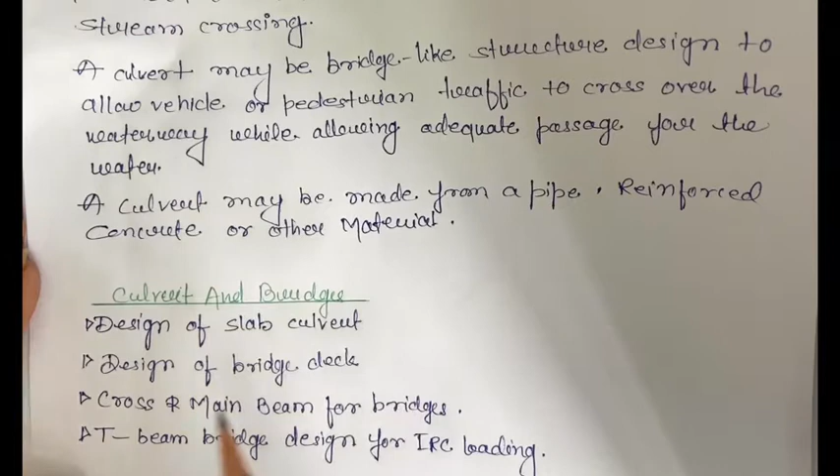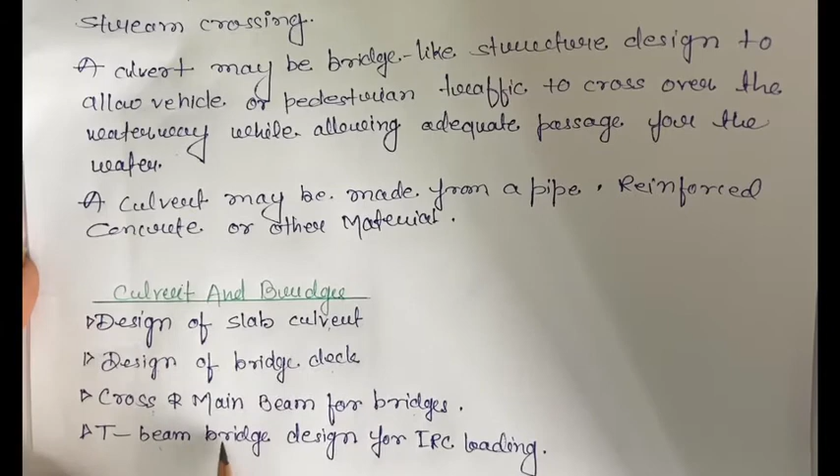We will start with the new topic, culvert and bridges. In this chapter, we have to study the design of slab culvert, design of bridge deck, and cross and main beam for bridges, T-beam bridge design for IRC loading. Okay. Culvert and bridges we are going to study.

Okay. So what is a bridge? A bridge is a structure built to span physical obstacles such as a body of water, valley or road without closing the way underneath. It is constructed for the purpose of providing passage over the obstacles.

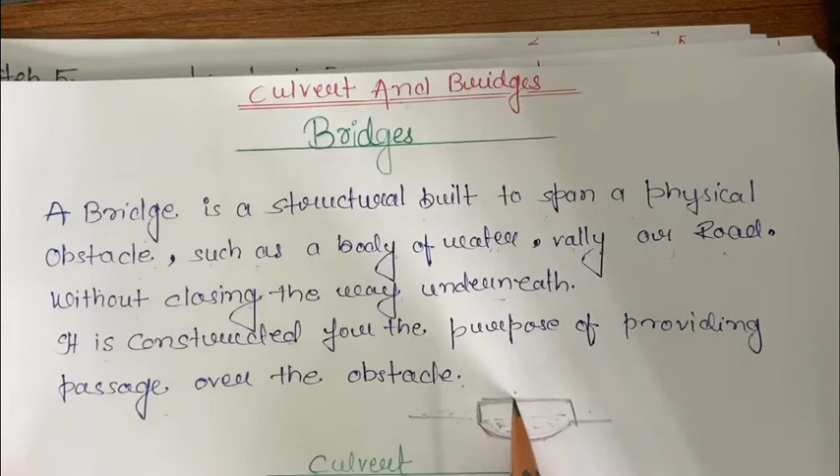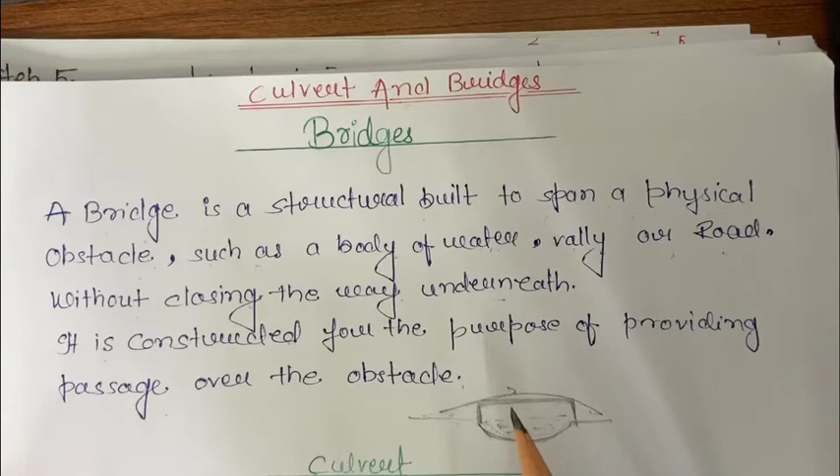Okay, so in this chapter we will know about the design of bridges, slab of bridges, beam of bridges. So first of all we are going to design a deck slab or solid slab of bridge. We will go through the design steps for deck slab, that is also known as solid slab. Okay, so what are the design steps for solid slab of bridge?

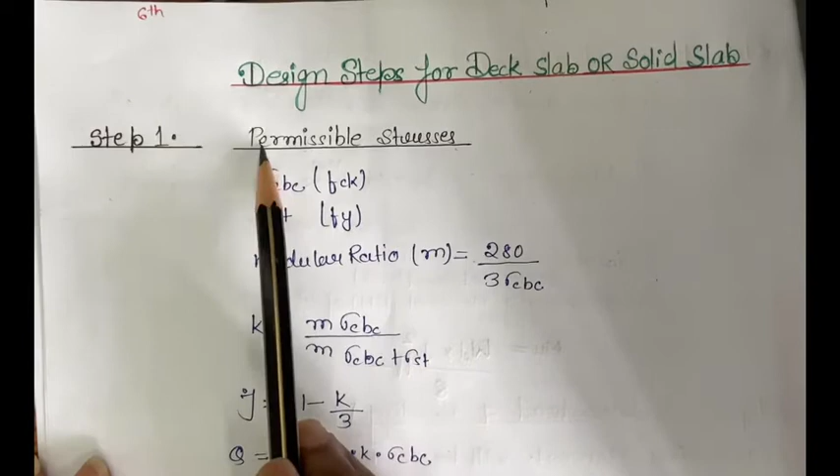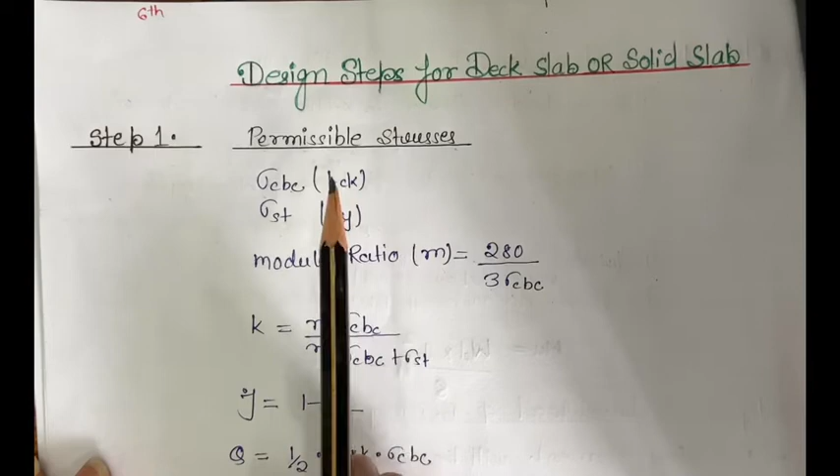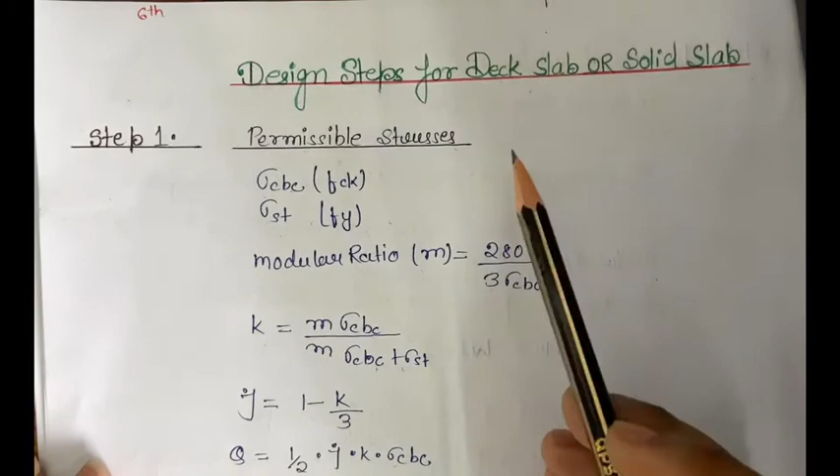Sigma CBC is the characteristic strength of concrete. Sigma ST is the characteristic strength of steel. Now we will find out K by the formula m sigma CBC divided by m sigma CBC plus sigma ST. Now we will find out J, 1 minus K divided by 3, and last in permissible stresses, Q equal to half JK into sigma CBC. Okay, in the first step we will find these things. In the second step we will find out the depth of the slab, effective span of the slab. First assume the thickness of the slab.

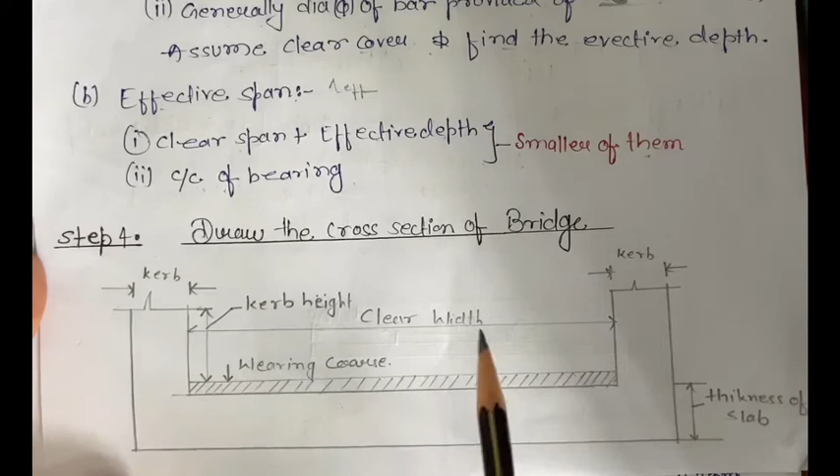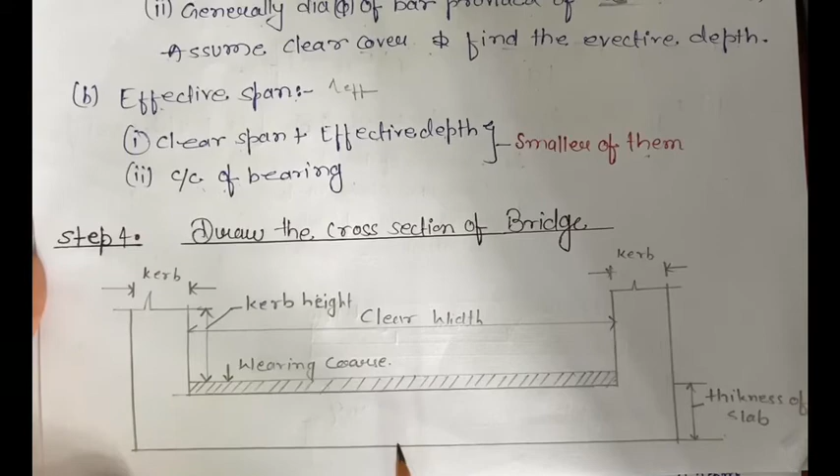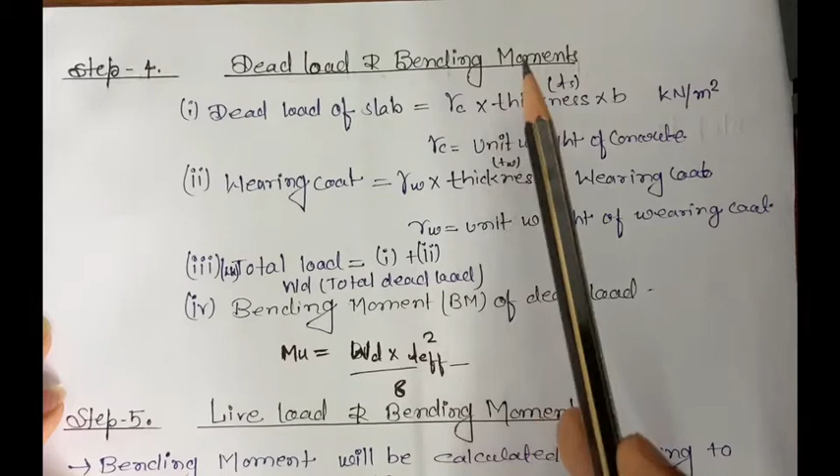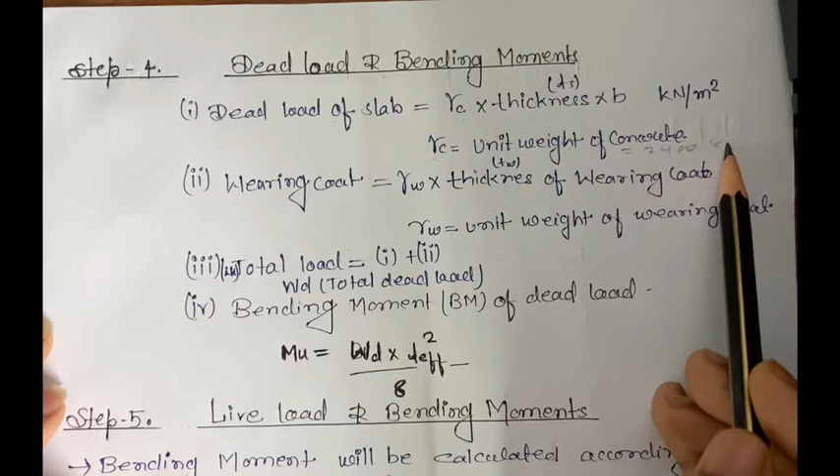In step number 5, that was step number 4 and this is step number 5. You will correct it. Dead load and bending moment. After the cross section of the structure we have assumed and designed, we will find out the dead load and bending moment of that dead load. So, dead load of slab equal to gamma c into thickness into B. Gamma c is the unit weight of concrete. We always assume it as 2400 kilonewton, and the thickness which we have assumed earlier, and B. Dead load of wearing coat.

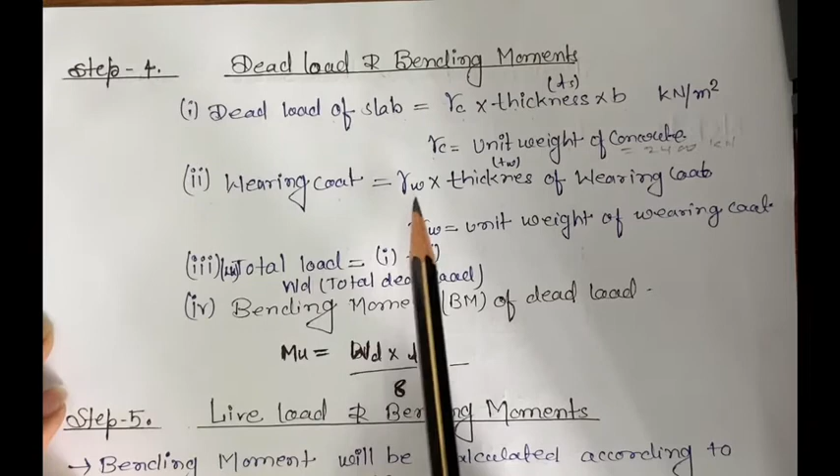So, gamma W, that is the unit weight of wearing coat, generally we assume as 22 kilonewton per meter cube.

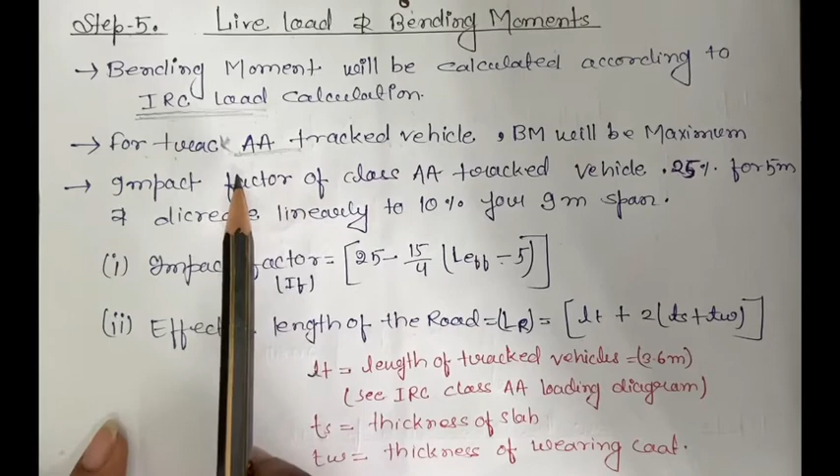For track AA class vehicles, bending moment will be maximum. Impact factor of the class AA track vehicles is 25% for 5 meter and decrease linearly to 10% for 9 meter span. Impact factor will be 25% for 5 meter span and decrease linearly to 10% for 9 meter span.

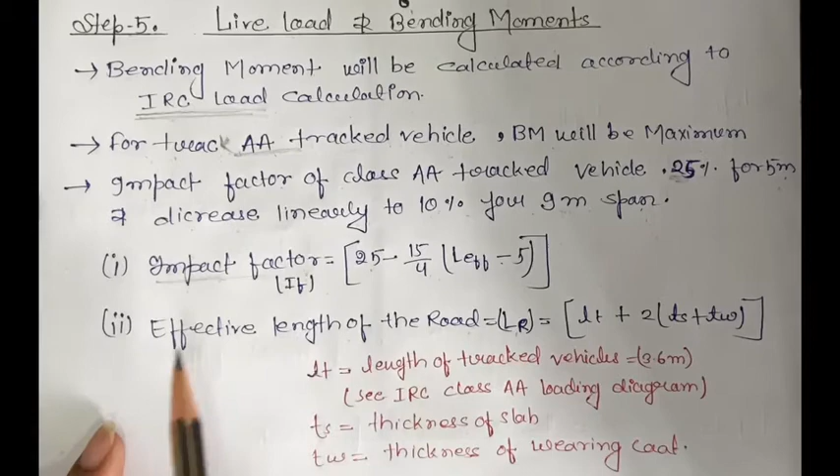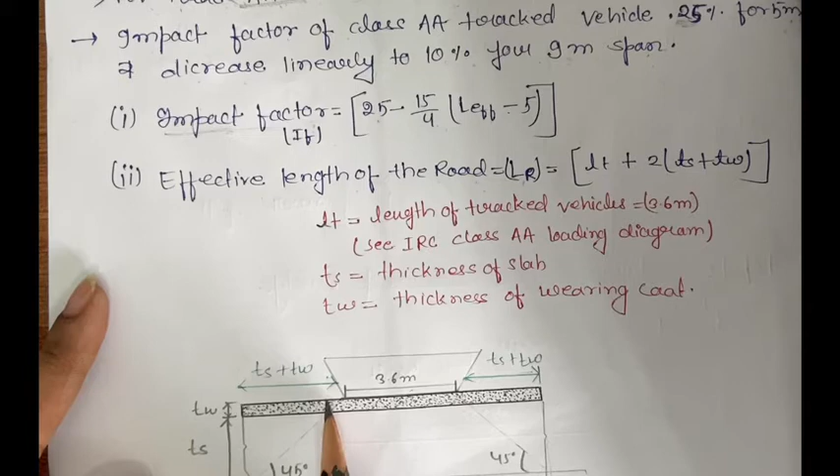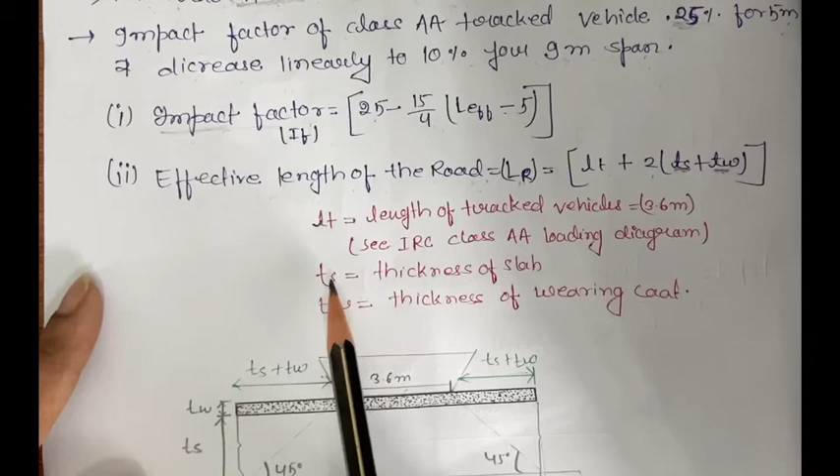That is the length on which load is coming, that is the effective length. Effective length of road equal to LR equal to LT plus 2 into TS plus TW. TS is the thickness of the slab and this is the thickness of the wearing coat. Okay, this is mentioned here that TS is the thickness of the slab and TW is the thickness of the wearing coat and LT is the length of the tracked vehicles.

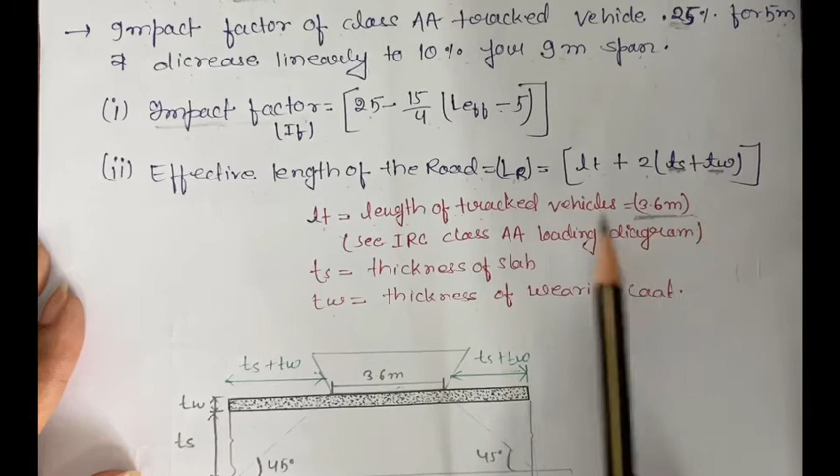X is the distance from center of gravity of the load from the nearer support. L is the effective span length and BW is the breadth of the concentration area of load. K is the constant and 2.77 for simply supported slab. Otherwise, it depends upon the B by L ratio and the value given in the table of IS 456 2000 code book. B is the width of the slab and L is the effective length of the slab.

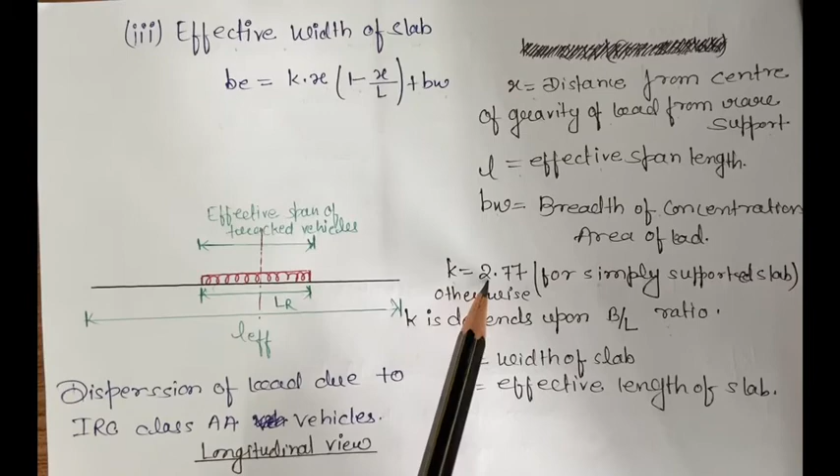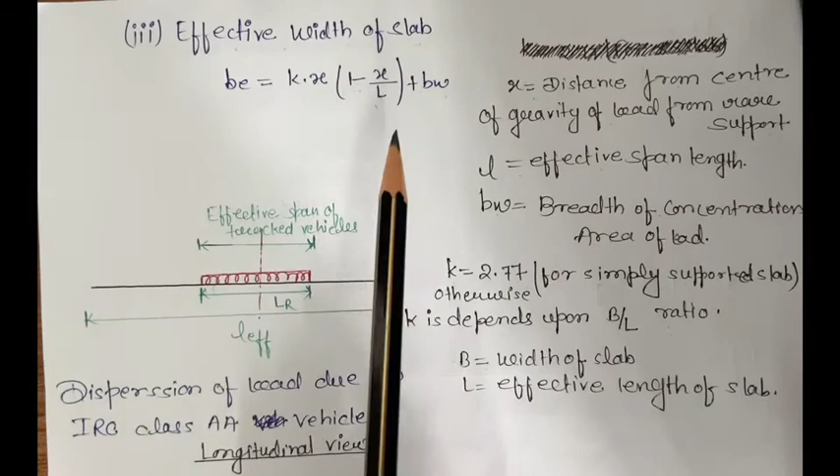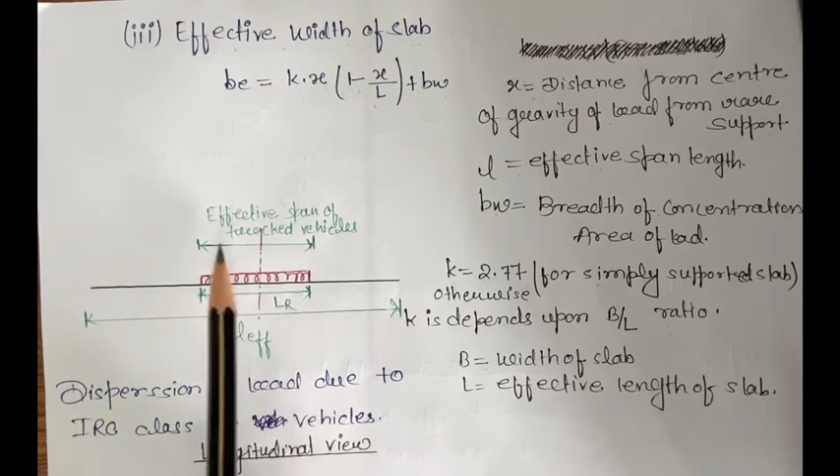So, we have effective width of the slab BE equal to K into x into 1 minus x divided by L plus BW. K is the constant; for simply supported we have 2.77, and x is the distance from center of gravity. L is the length of the slab and BW is the width of the concentration area of load. So this is our total length and this is the effective length of road, effective span of tracked vehicles, and this is the L effective, that is total effective length of the slab.

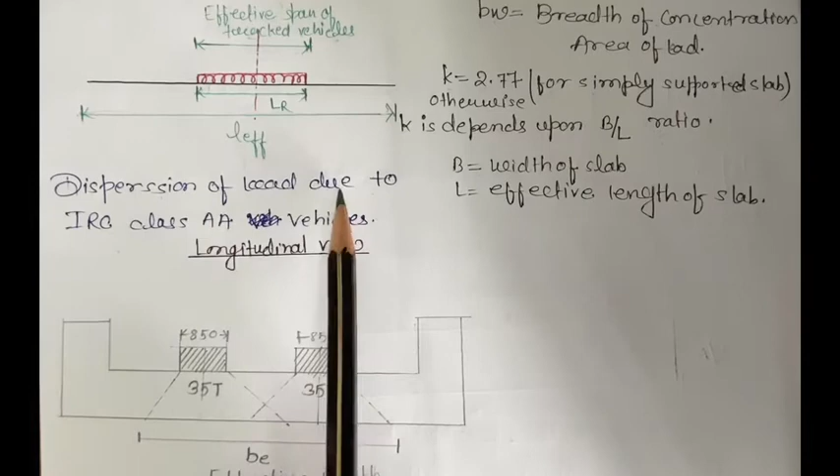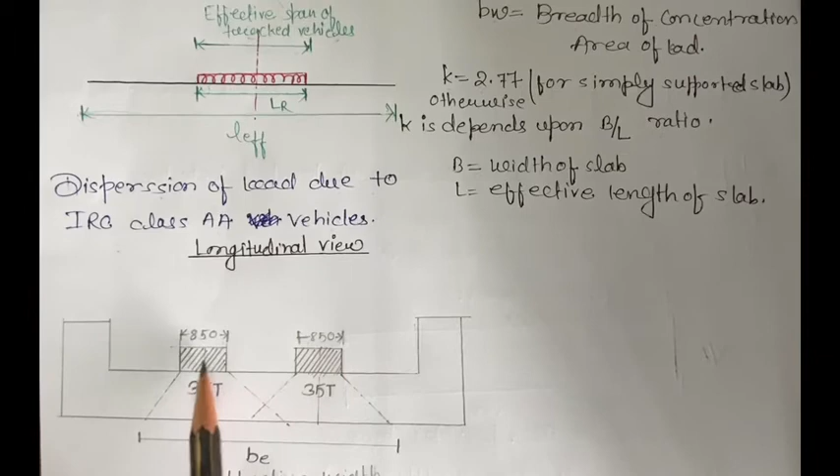Dispersion of load due to the IRC class AA vehicles. In the longitudinal view, we have the vehicle's wheel with a length of 850 mm and 850 mm, and one vehicle's weight is 35 tons, and the other vehicle is also 35 tons. This is BE, the effective width of the slab.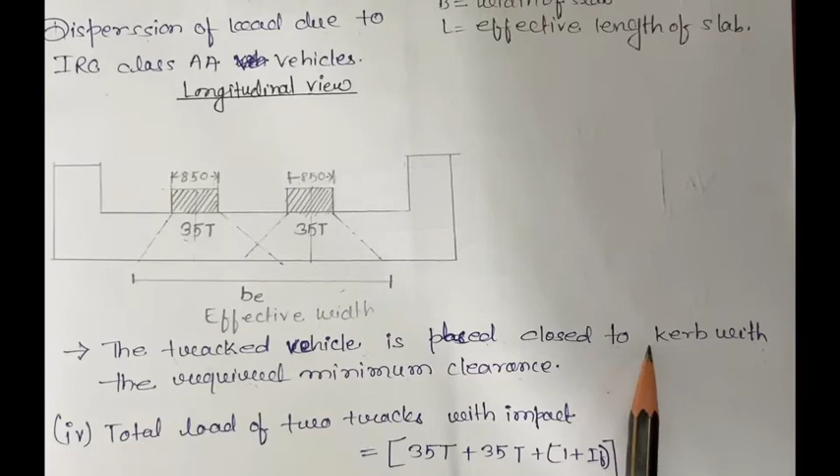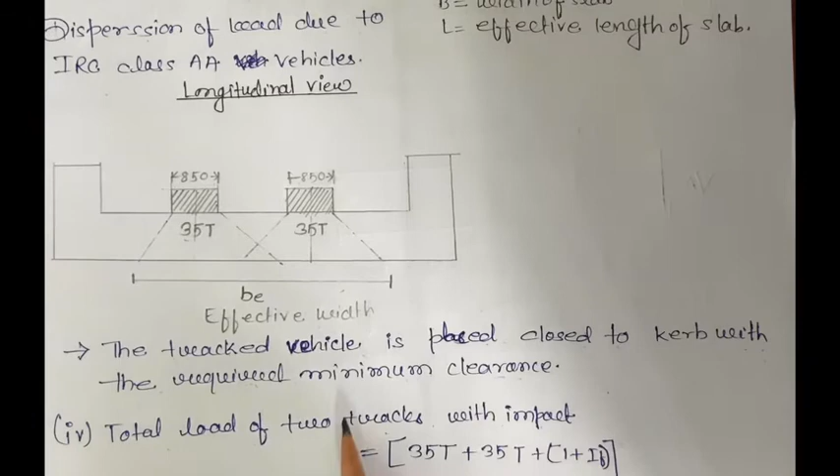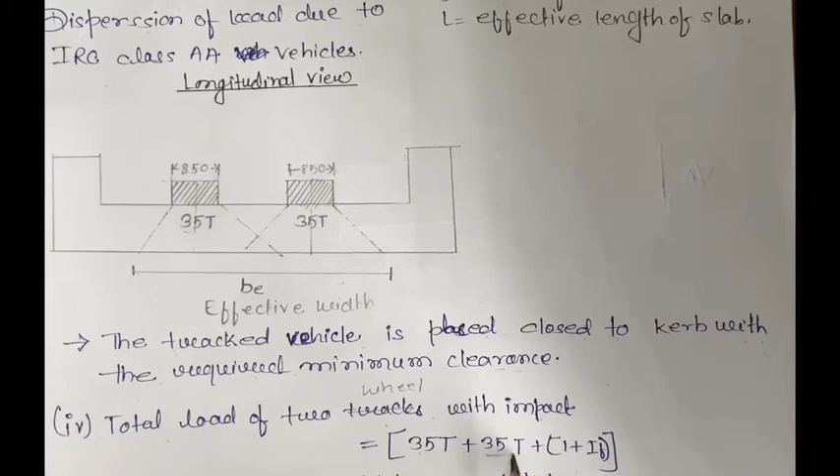The track vehicle is placed close to the kerb, with the required minimum clearance. Fourth, we have to find out the total load of two tracks with impact, also known as two wheels with impact. Then we have one wheel of 35 and another also 35, plus 1 plus impact factor.

1 ton equals 10 kilonewton, where 35 tons equals 350 kilonewton, plus 350 kilonewton into, this is the into sign, 1 plus impact factor.

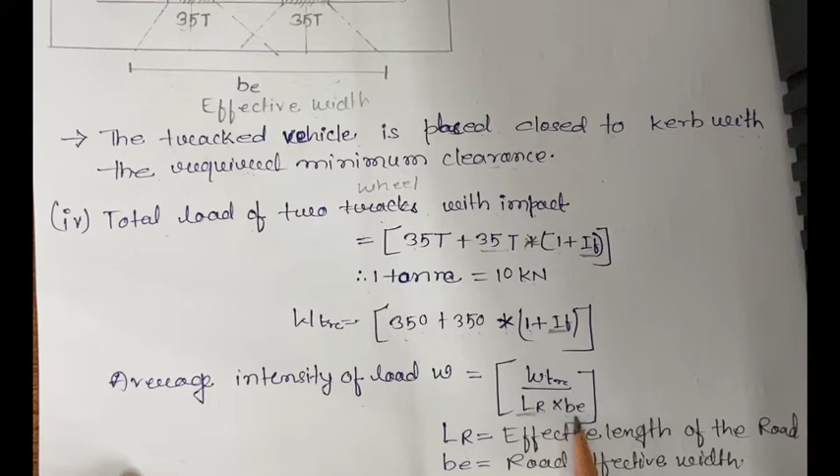Average intensity of load W equals W_tr, load on the track, divided by LR. L is the effective length of the track into BE, effective width of the track. LR equals effective length of the road, and BE the effective width of the road.

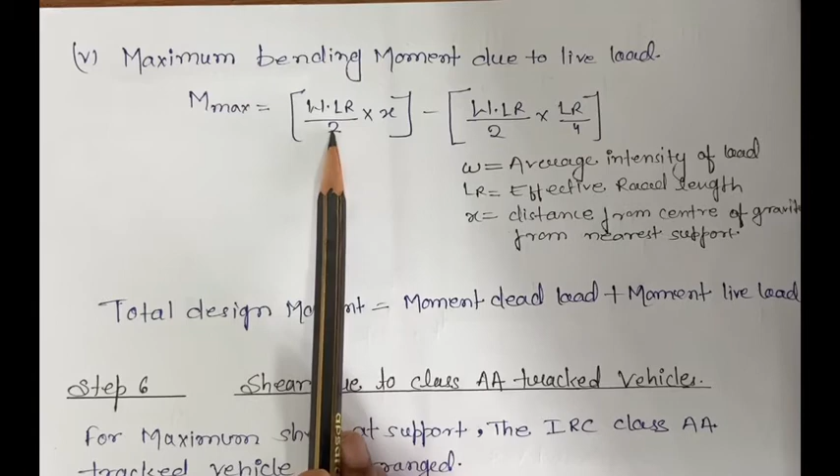Thereafter, maximum bending moment due to the live load. We have the formula for maximum bending moment: W into LR divided by 2 into X, minus W into LR divided by 2 into LR divided by 4. This is the formula for maximum bending moment due to live load. For total moment, we add the moment due to dead load and moment due to live load.

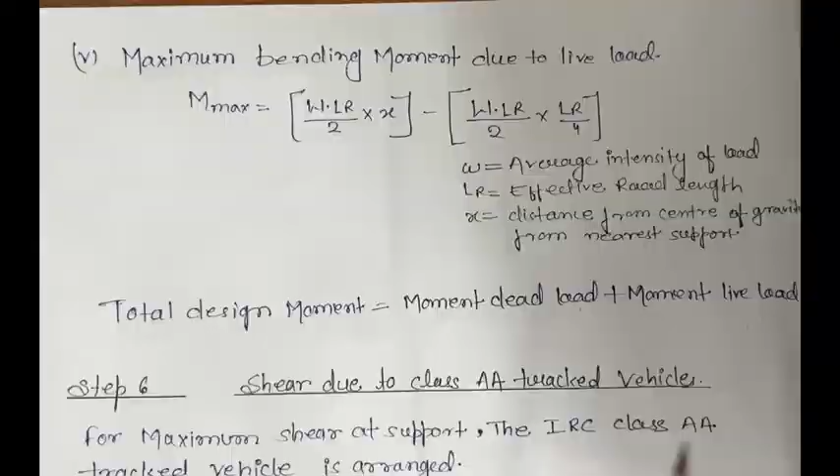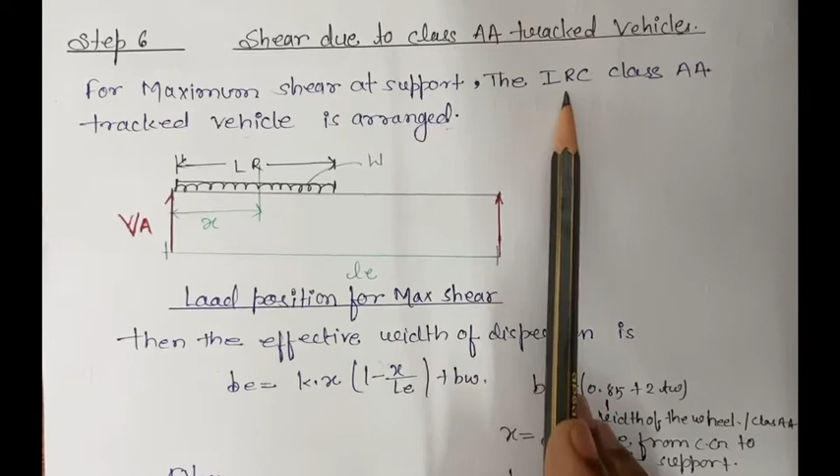Step 6, shear due to the class AA tracked vehicles. For maximum shear at the support, the IRC class AA tracked vehicle is arranged. The IRC given condition for class AA vehicles states that maximum shear will occur at the support. If the vehicle is arranged this way on the slab, which we have designed for the bridge, then maximum shear force will develop at the support. This is the load position for maximum shear by the IRC.

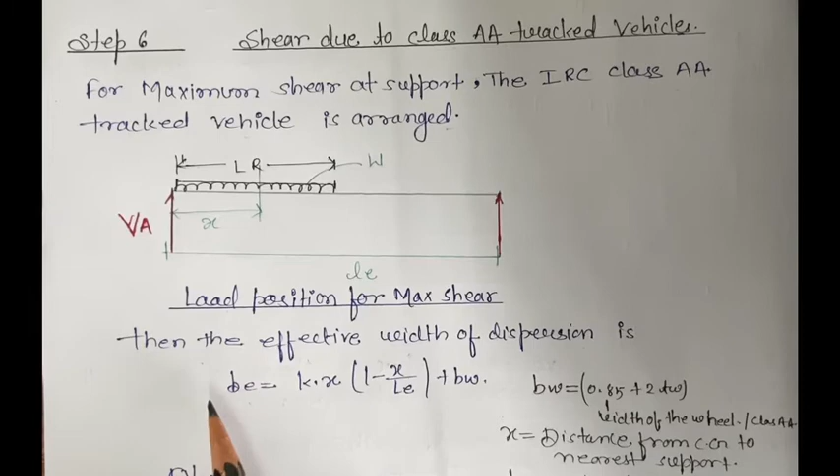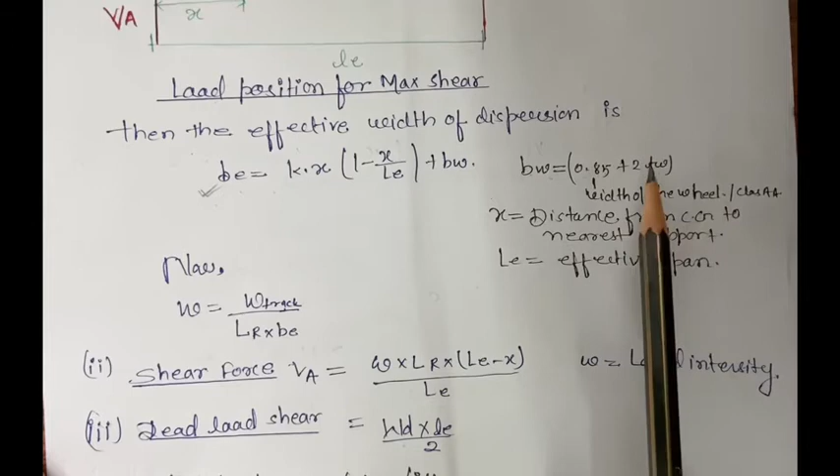Then the effective width of the dispersion is BE. We have earlier found the value of BE, and BE we will again find by this value. BW equals 0.85 plus 2 TW, thickness of the wearing coat, width of the wheel - this is the width of the wheel, 850 mm converted into meters, so 0.85 meter width of the wheel, and this is the thickness of the wearing coat. X is the distance from the CG of the nearest support, and LE is the effective span.

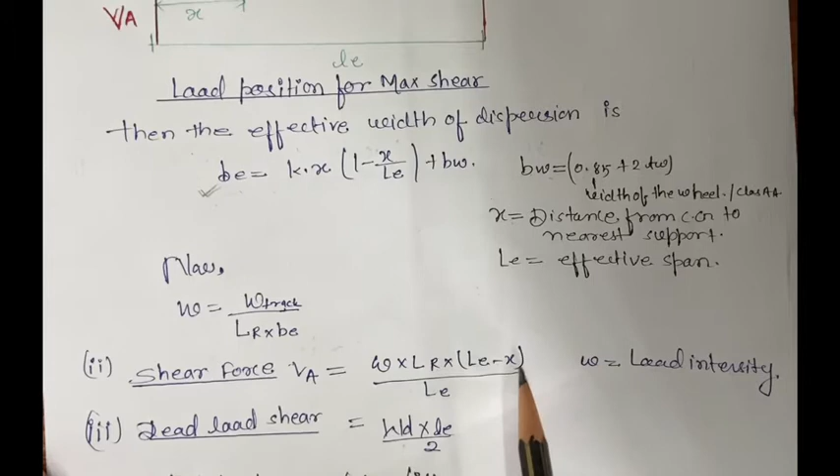Now W equals W track divided by LR into BE. Shear force VA equals W into LR into LE minus X divided by LE. W equals loading intensity - this is the loading intensity, how much load is coming, that is.

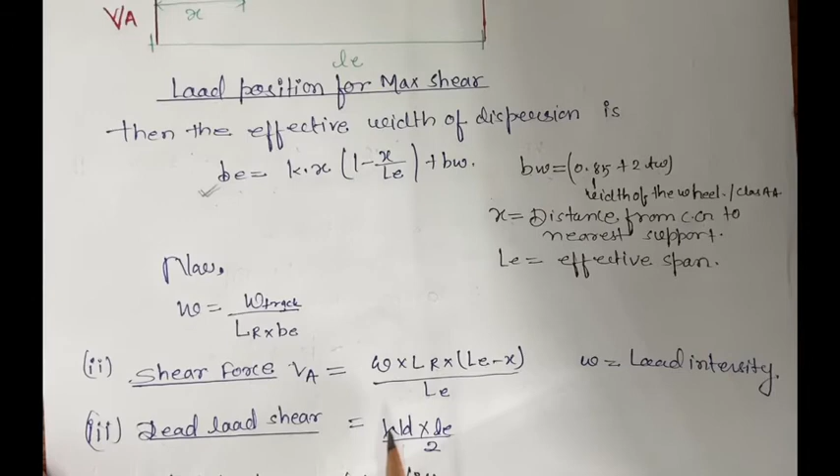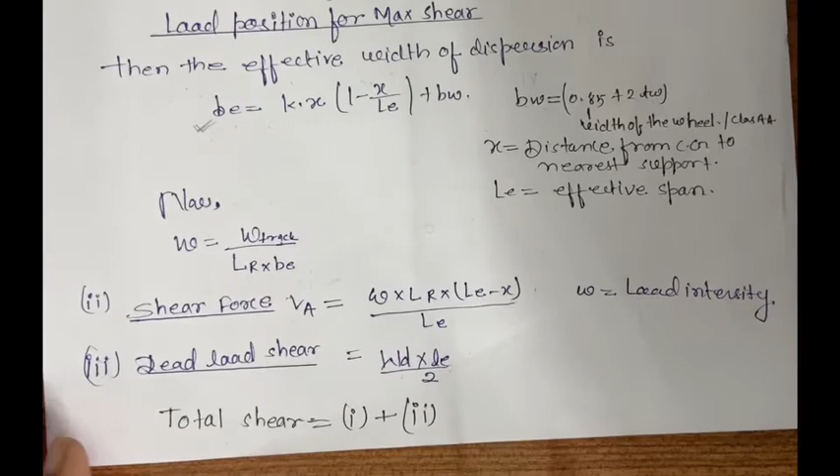Thereafter, dead load shear equals WD into LE divided by 2. For total shear we have 1 plus 2, the values we have from this and this we will add for total shear. In step 7 we have to design for the deck slab.

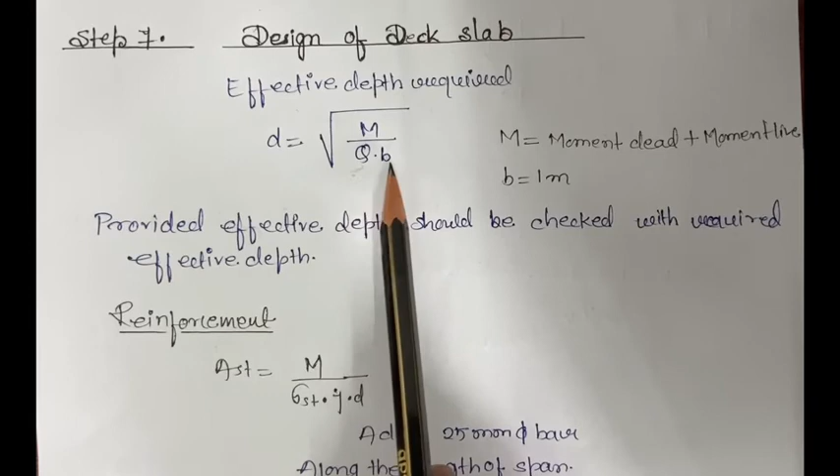Effective depth required, D, equals under root of M. M is moment by dead load and moment by live load both. We will add moment by dead load and moment by live load, then the value comes out that we will put here, divided by Q. In permissible stresses, in step number one, we find the value of Q into B.

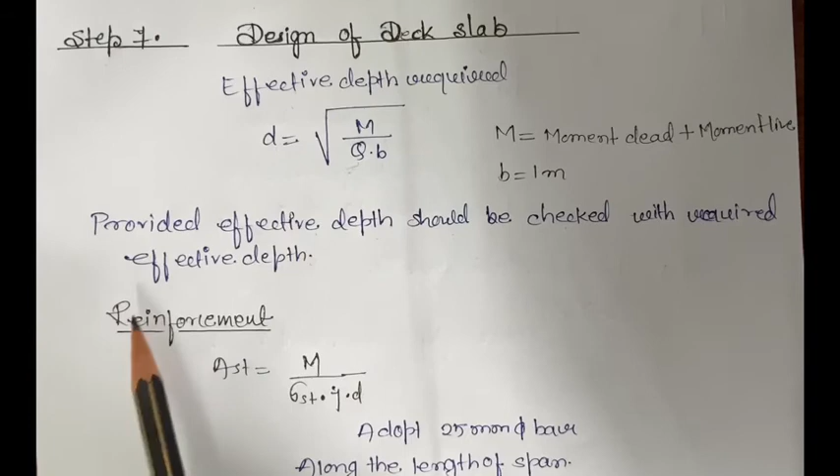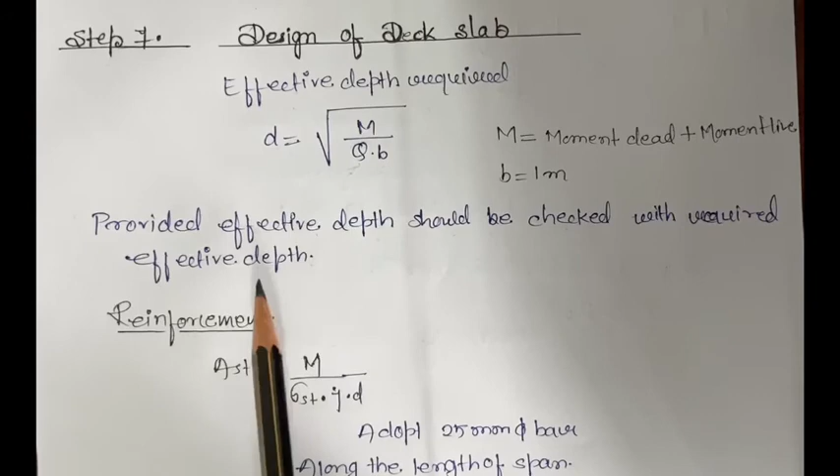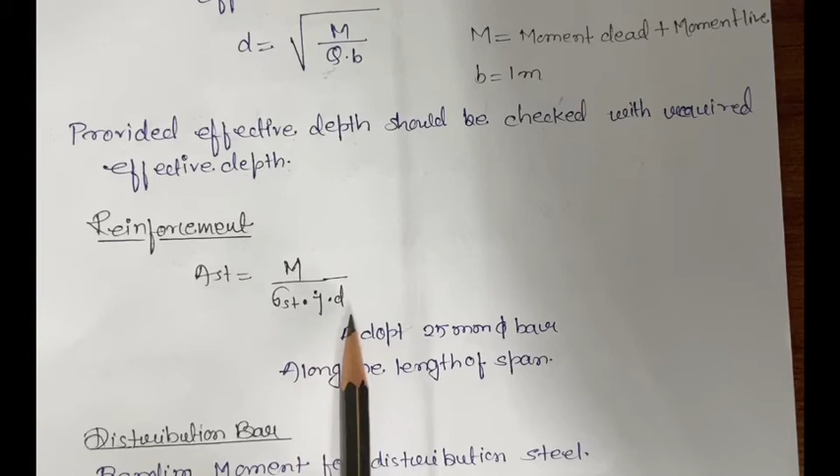Adopt 25 mm diameter bar along the length of the span.

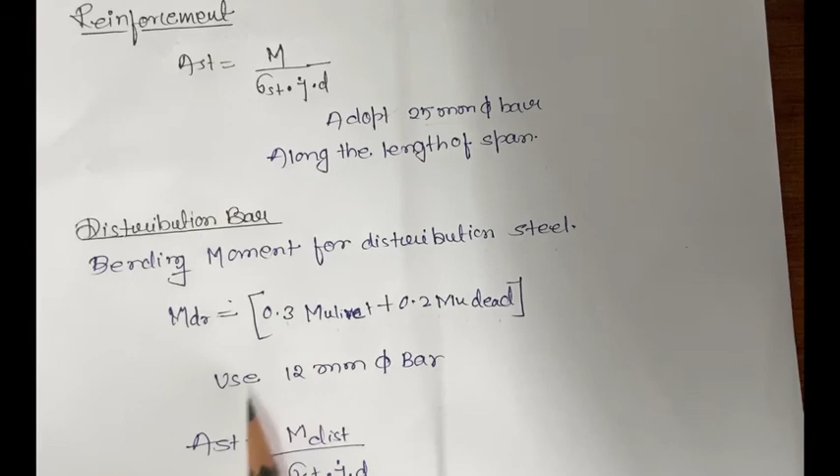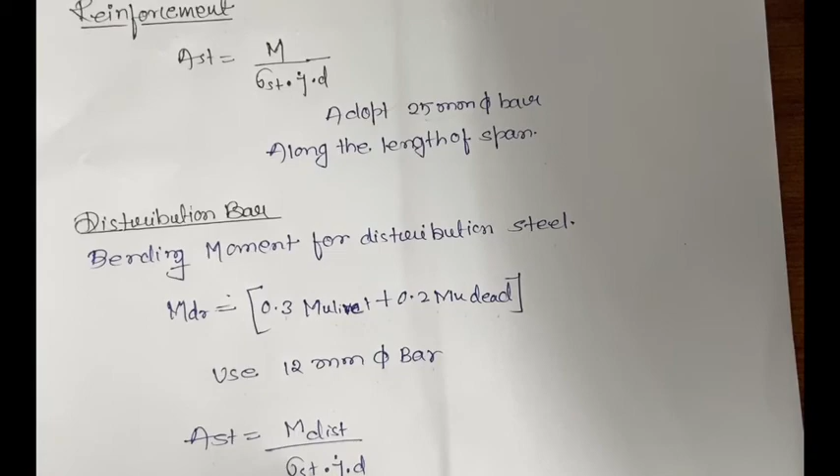Thereafter we will design for the distribution bar. Bending moment for distribution steel equals 0.3 of moment live load plus 0.2 of moment dead load. Use 12 mm diameter bar for the distribution reinforcement bar, and AST equals M distribution, the value which comes out, divided by sigma ST into J into D.

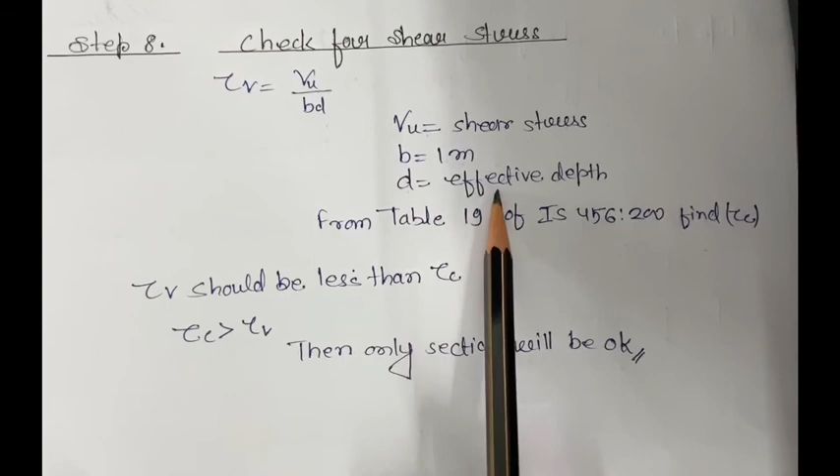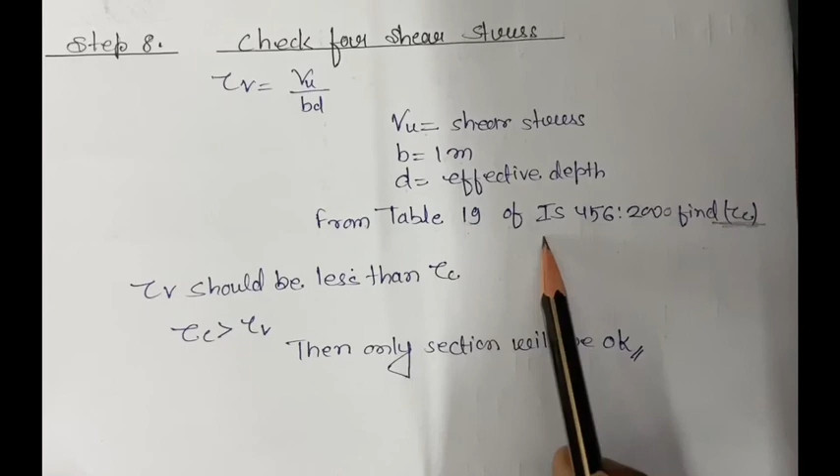Thereafter we will check for shear, tau V, VU by BD, VU equals shear stress, B equals 1 meter and D is the effective depth. From table number 19, IS 456 2000, find the tau C from table number 19 on page number 76. Tau V should be less than tau C. Tau C should always be greater than tau V, then the section will be okay.

Now we will solve one question from your previous question paper.